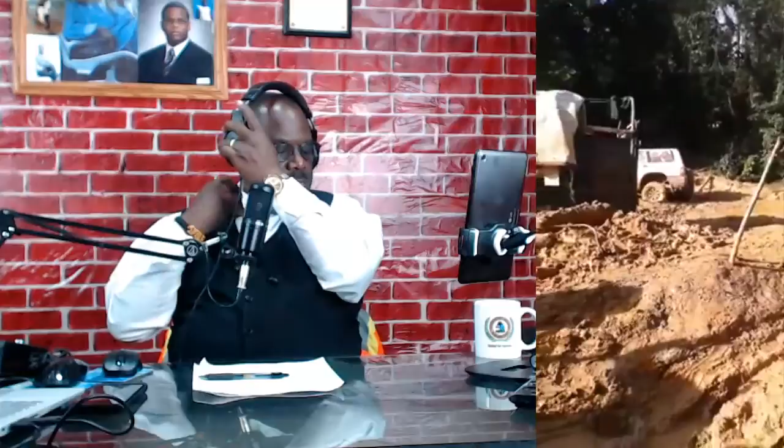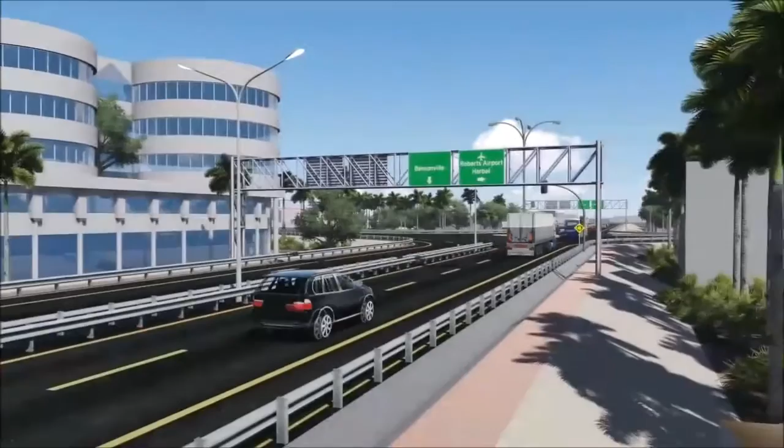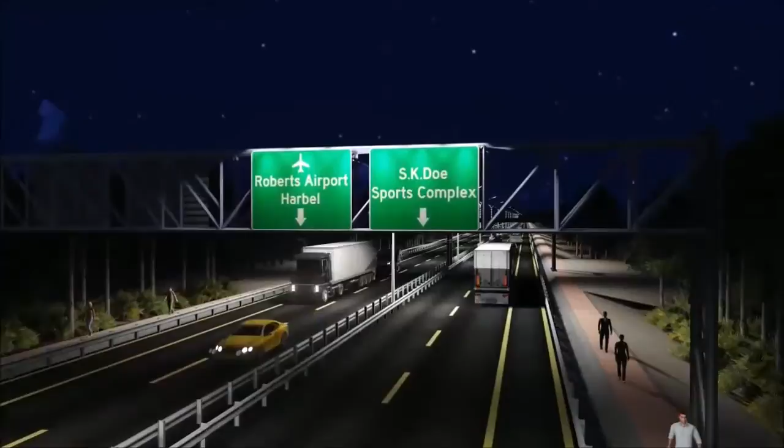D12 on the beat. All I do is win. Born to win, I say I was born to win. I say I jump over it, the hole you dig by me, I jump over it. They will see it. Jehovah bless you, no man can curse you. All I do is win.

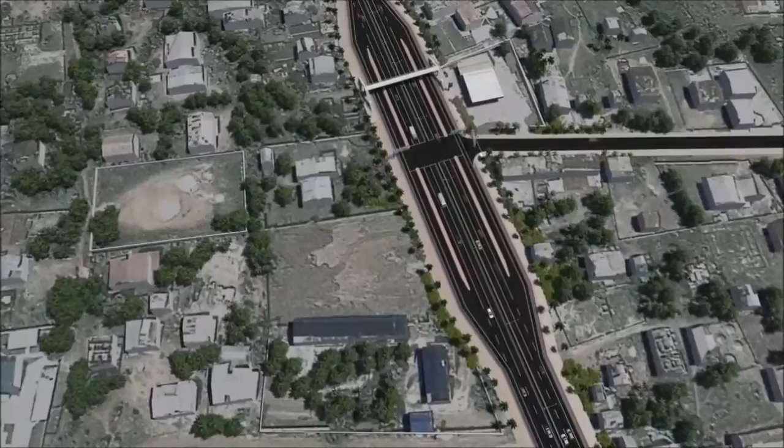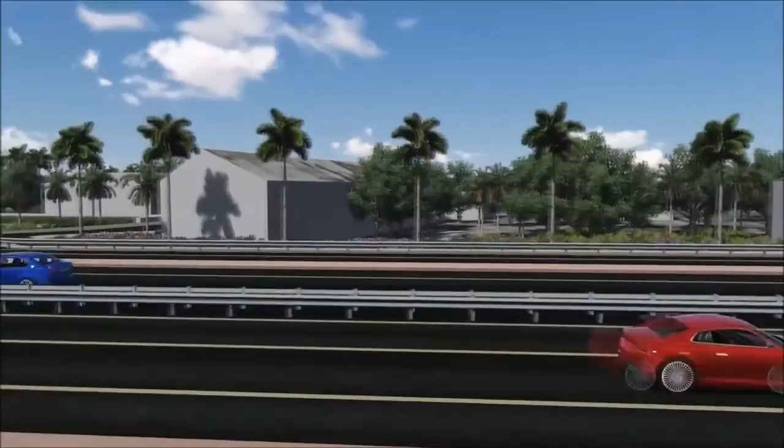Born to win. I say I was born to win. Born to win. I say you was born to win, yeah. All I do was win. I say I jump over it. The hole you dig for me, I jump over it. I say your time, now your time, nobody can stop it. They can do what they do, and they can talk what they talk.

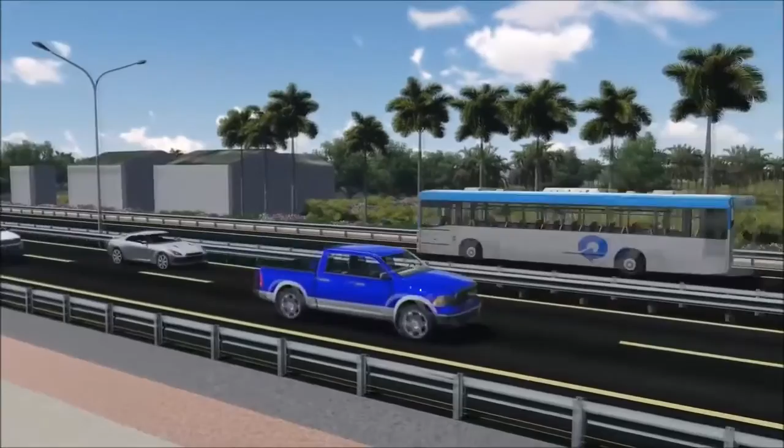Hey, turn the fire, Holy Ghost fire. All I do was win. Born to win. I say you were born to win, yeah. They will see a koro with a big eyeball. They will see a koro with a small eyeball. Jehovah bless you, no man can curse you. I say your time, now your time, nobody can stop it.

I say I jump over it. The hole you dig for me, I jump over it. All I did was win, win, win. Born to win. I say I was born to win. Born to win. I say you were born to win.

So that's just a schematic, just a drawing, rendering of what they think is gonna happen. But like I said, if that was something that they're truly gonna build, there's no way. Even if they're gonna do it like that, even though it's not gonna be by standard, there's no way. They don't have that kind of money anyway. But let's go on. I will show you now

another video. This video is about typical cross-section, and since I'm going to be talking about public works typical cross-section here tonight, pay attention to this typical cross-section they're going to show you. Okay, in Liberia, the reason why I'm bringing these things up, these people are going to spend a lot of money on this road, and it must be done properly, even if it's not to modern day standard. They shouldn't give us something like what they did with

what I call the Monrovia Kakata Highway. Monrovia Kakata Highway was built back in the 40s and 50s. Okay? Way before my time. But anyway, Madame Sirleaf and her people came. They said they want to redo the road, which was a beautiful idea. At that time, we didn't have Facebook and what have you. So I was on air and I was saying, but of course, LIBERIA Public Radio will be on air for a long time. Anyway, the point is, they took the alignment.

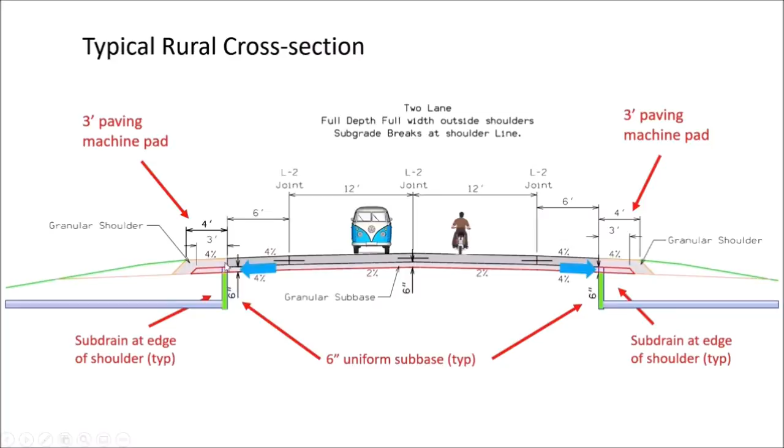This is a short video about roadway fundamentals. One of the things we do in our state in rural areas is we use a concrete cross-section. We usually have two 12-foot lanes, two 6-foot full-depth shoulders, and you can see they're usually connected with steel at the joint. We have this thing called a 3-foot paving machine pad, to allow the paving machine to drive along the side and have a good base to drive on. We have sub-drains to drain all the water that's underneath the cross-section, and it'll drain it out to the medians. Once it's paved and the machine goes off, we'll just cover this up with some granular material, and that's the cross-section in the rural areas.

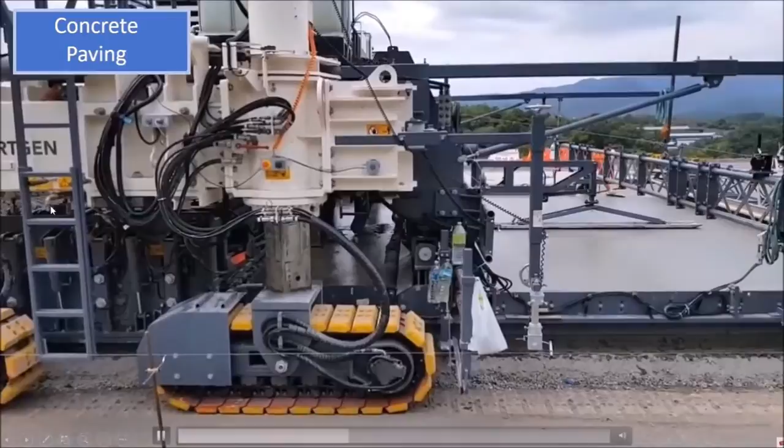So you might have to cut this area out and fill this area in over here to build the rest of your cross-section. Most cross-sections have two 12-foot lanes. It could be up to 4 lanes, 6 lanes, depends where you are in the city. 2% is typically used to get the water to go off to the curb and gutter on the sides.

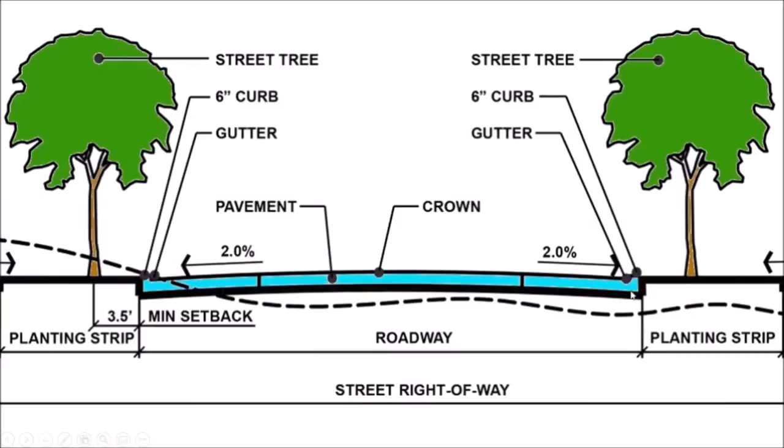We have a planting strip, put a little green area in, partially to make it look good and partially to protect the sidewalk where pedestrians are going. In the United States, we have a maximum grade of 2% cross slope. That's for the ADA, the Americans with Disabilities Act. So 2% is the max.

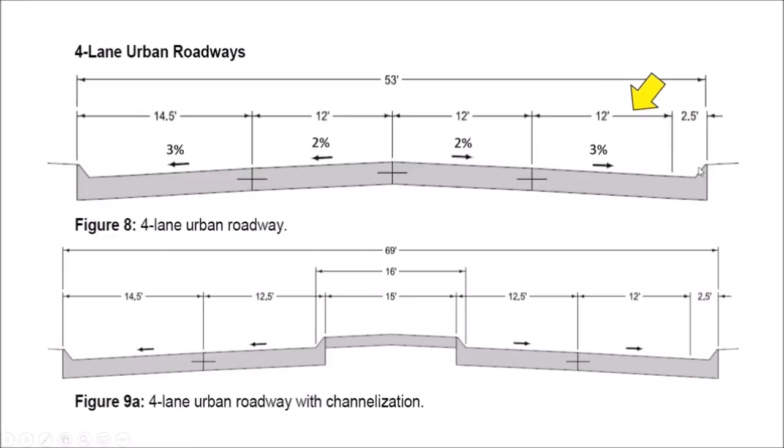I just wanted to show you with this slide that typically we start with 2%, then we might go to 2.5% in the next lane, and then 3%. It's to get the water to drain off a little faster and a little faster. The more pavement you have, the more you have to drain the water off. And this would be a 12-foot lane with a 2.5-foot gutter over here. Typical cross section, two 12-foot lanes on both sides, a median, some green planting area.

Things you've got to think about: curb and gutter. You've got to have curb and gutter. You're going to need some drains for the water, obviously. Sidewalk. You can see in some urban areas they don't have this green strip because they just don't have enough right-of-way. They don't own enough property to build this sort of thing.

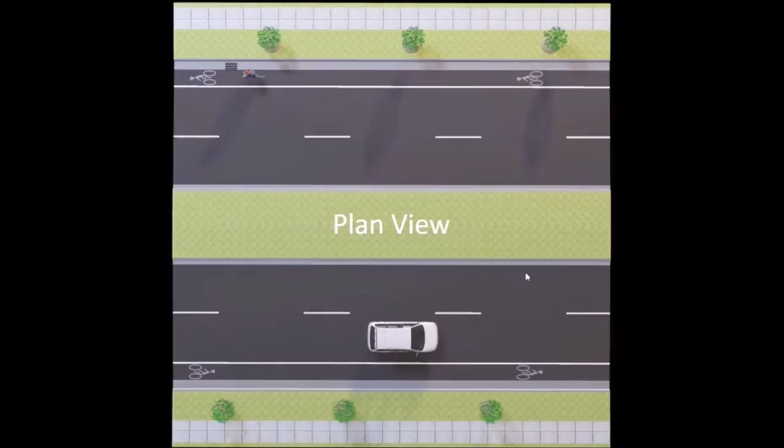This is called a plan view. So when you're looking at a plan set, you're looking straight down from the sky onto your project. So this is a plan view. Typically in engineering drawings, we lay things out in a plan view. So this is a horizontal alignment. It's the alignment of the road. We're starting with station 0, going to 100, 200, 300.

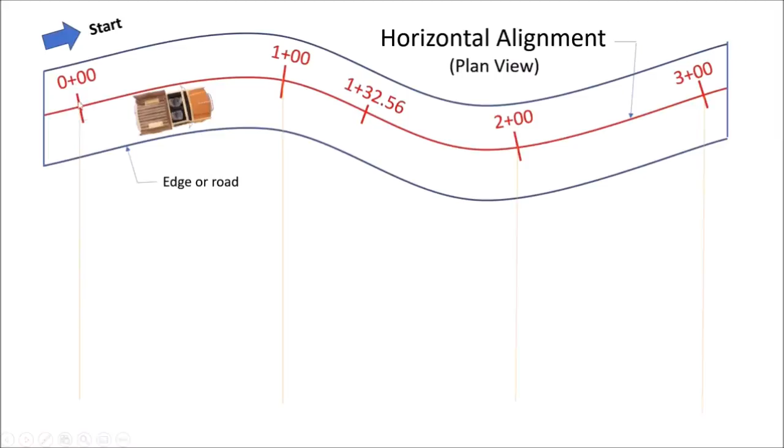Some point along this curve, 132.56 feet. So that would be 132.56 feet from here. We use the horizontal alignment to lay out the stations. And from these stations, we can see the elevations. And the elevations of the roads are called the profile view. So this is a vertical alignment. And you can see the station is going to correspond to different elevations so we can lay out the road.

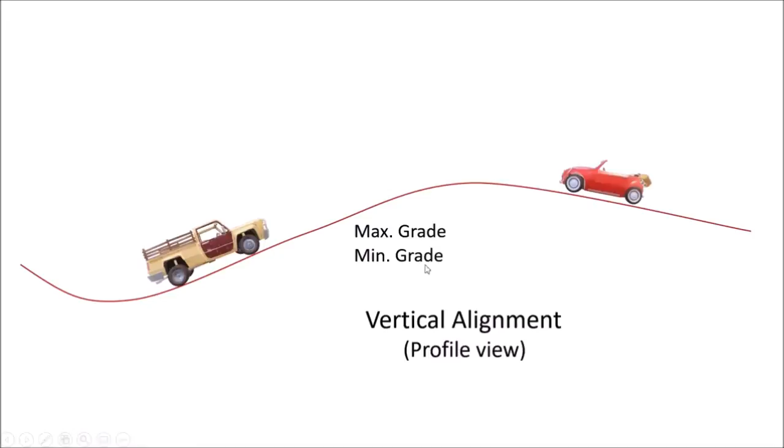When you have a vertical alignment, things you have to worry about are the maximum grade you're allowed and the minimum grade. You don't want a big grade, I don't know, 11%, because it's hard for trucks to get up carrying a full load. And you don't want a maximum grade going downhill of 15% because it's really hard on the brakes on big trucks.

Other things you've got to worry about is sight distance. When you're passing someone, you want to see oncoming cars, you've got to worry about how your profile is working so that you can see other cars. Three types: intersection sight distance, stopping sight distance, and passing sight distance.

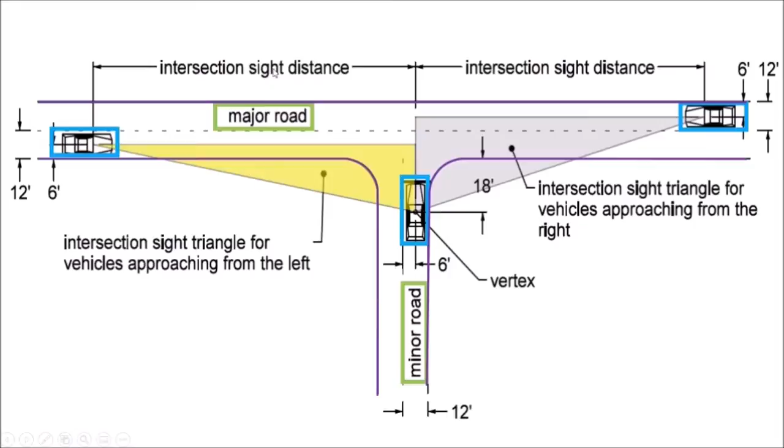So intersection sight distance: there's a car here on a major road, a car here on a major road, minor road. There's the cars, and you're pulling in from a little minor road and want to get on the freeway. Well, the other cars can see you. The car on the left can see you at a certain distance. It's usually a triangular sort of system. That's what they're going to say they can see when they're driving along. And they can see the car.

That's good. Car on the right, same sort of thing. You're going to be watching your lane and be able to see this car coming into traffic. So the last thing you want to do is put any trees in here so you block the view of these 2 cars on the major road. So you've got to worry about intersection sight distances and obstacles that go in these different corners.

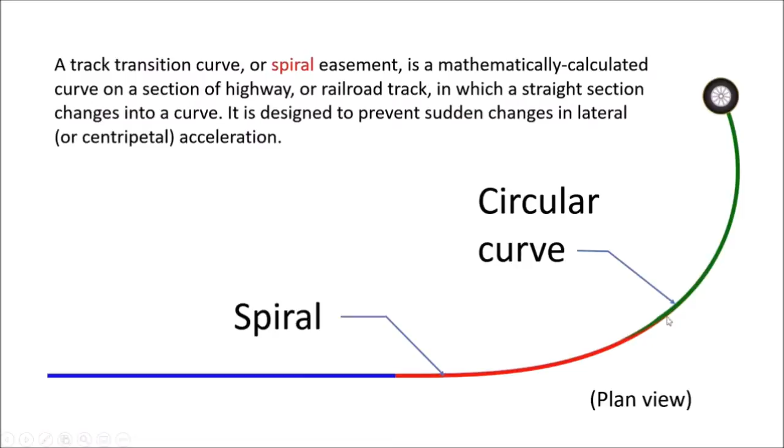When we design a road, we typically have straight sections, makes sense. We have curved sections, and sometimes we use spirals. Spirals are just a transition from a straight section to a curved section. In highway design, we don't use a lot of them, but if we have to, we'll use a spiral to reduce the force going around this corner. If it's a really high-speed corner, you might have a transition from a straight line to a curved line using a spiral. Typical roadway cross-section. If you're building new, your existing ground might look like this.

So one of the things you want to do, you've got to be aware you're going to cut this material out and you're going to need to fill this material in. So when they want to do a mass balance of cut and fill, they try to put the roadway somewhere that this cut can fill this fill. That way you don't have to haul long distances or bring in extra material. So that's one of the things you want to look for when you build your profile.

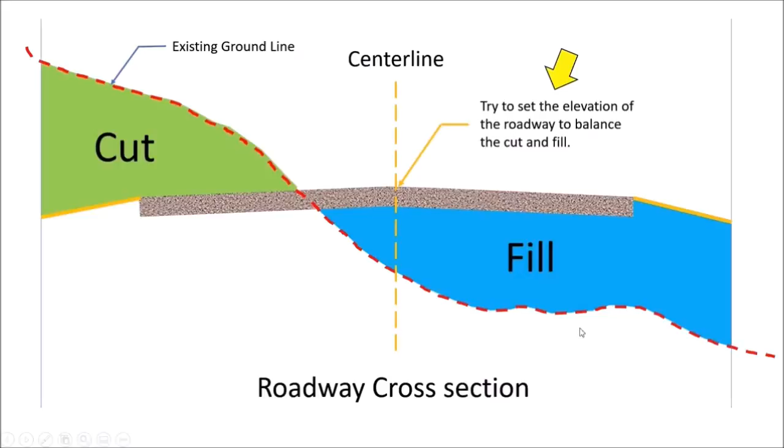Now, the young people from Ghana that come in and do the design. This last one you saw there, where the guy has a dotted line, like a dash. That's like an existing ground, and the part that's hanging up there is the structure section. Well, the young people coming from Ghana, they don't put any kind of shoulder backing or anything like that. They just leave the pavement hanging up there. So nothing here on the side. And that's what you find on the beach behind the BTC over there. This company that is giving the contractor, they're doing that.

So let me now go ahead and show you something here, okay. I might just have to take my own picture, but before I take my picture, I just want to see something here. This is going to be the first thing I want you to look at when I show this. You see what it says over there? Owner, Ministry of Public Works. They own this, so I'm not making it up, folks. So here is what I want you to see. I don't need to show my picture. Okay, but I want you to see here.

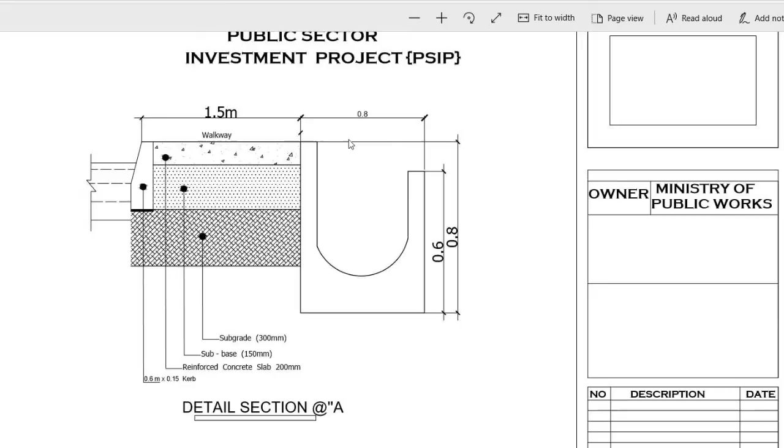Okay, this particular detail here. Typical cross section, public sector investment project. PSIP, I don't care for that one. That's them, okay. But this is what I want you to see. You saw the cross section that I showed you earlier. The guy came out and was showing you how to do the drainage and things like that.

Now, this other one here, you see this squiggly line here, you see my mouse moving? Where you see my mouse moving, that's like a cut. There's a continuum. That's a pavement section that continues on. This is from Public Works. So what they have here, this is like asphalt pavement, they say, where my mouse is running here. Then behind that, that's a curb.

And this is the flaw, because if you go on Somalia Drive, this is how they build it, because Public Works gives them these things. I don't agree with it, and here's the reason: if you don't have a monolithic type of curb here, in other words, you have a curb but it's separated, so you're paving asphalt against it. Let me zoom in some more so you can see what I'm talking about.

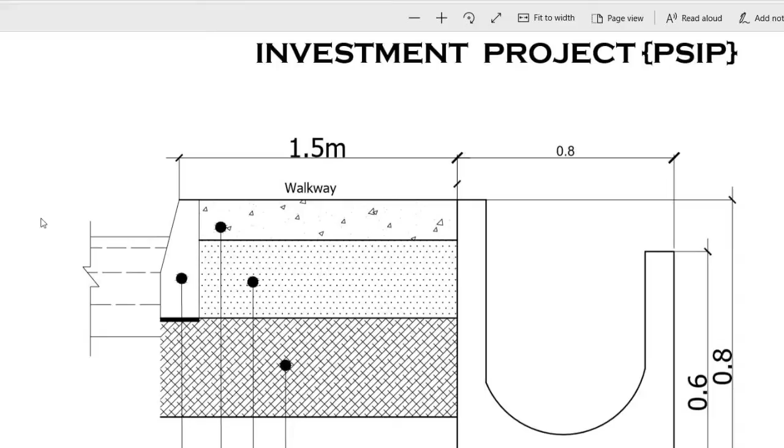Okay, so this particular curb here. This is supposed to be the pavement, where my cursor is going up and down. So they put the curb here and they pave against it. There's a huge chance that there's going to be a leak between the asphalt and the curb. The water is going to seep through here. However small, it can seep through there, and then it goes through your pavement, and then you have problems, especially in Liberia, where we have a rainy season like that. So that's what they do here.

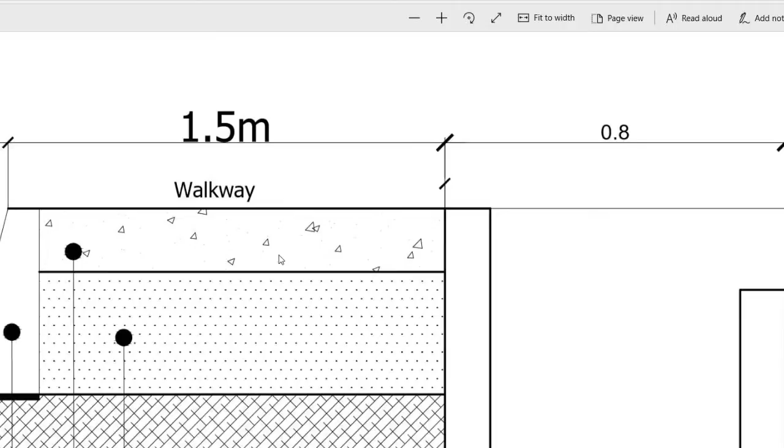Let me show you something else. So from there, on top of that, they have sidewalk. Then they have the dirt underneath. Then they have a real subgrade. But the main thing I want you to see is this is how they build their drainage system in Liberia. You see in the back here, they call it a U drain. A U drain is like a letter U. So this is open. So if it rains, water gets in here, which is good.

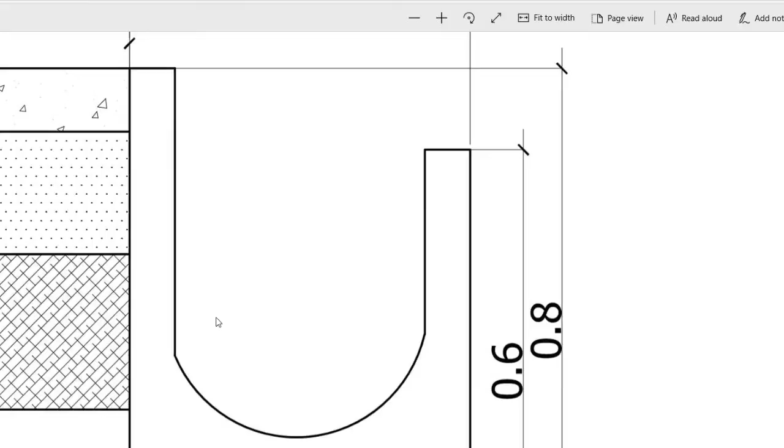But what happened to the water from the street? Do you see any kind of connection here between the U drain and this asphalt? I don't see it. So the water that comes into the U drain, you're collecting it from somebody else's property. It has nothing to do with the road, nothing whatsoever. But this is what they give us. Let's go to the street level. I'll just show you the detail.

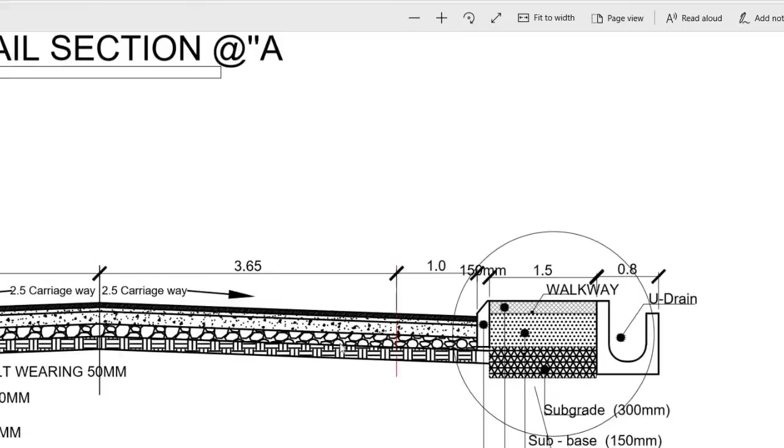Okay. Let's go to the street level, and then you'll see what I'm talking about. Okay. This is from Public Works, folks. I'm not making it up. I just told you, I'm not making it. Okay. Here's the road here. Here's the U drain they have by here. So from the U drain, they have this, and then they have the curb.

Now the pavement, I told you the slope they have. Let me make it bigger so you can see the slope. And it's 3.6, which is 12 feet. Okay, so that's meter here. So the 2.5 carriageway, that's the slope from the crown here. Okay, now if you're draining this water, where is it? How is it going to get back to the U drain back here, my people? You tell me now. Tell me now.

So what I'm assuming is that this water is going to go far away somewhere before it gets into this drainage. Because right now, if it's raining and the slope is sloping downward and you use this, I can see. But why will you not even put something here to go to the U drain?

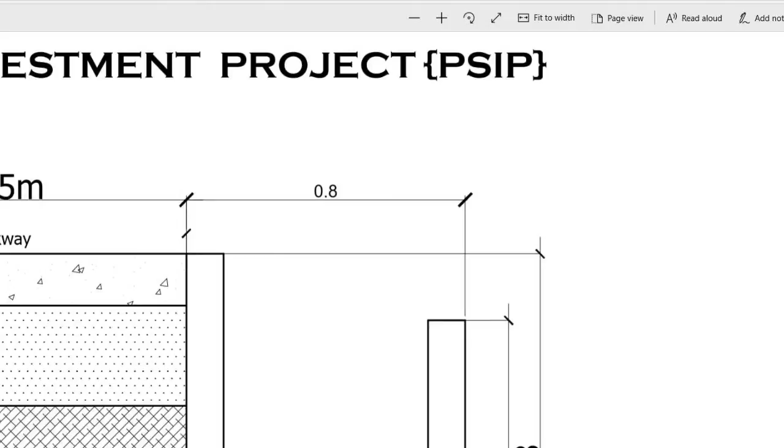Okay, let me show you again, folks. This is from Public Works. Let me zoom out so you can see it. Right here, you see it? Okay, Public Works. That's what they're giving us. So when I did the work for them, this is what they showed me. This is Public Works, folks. Owner, Administrator of Public Works. All right, and I'm not degrading them. I'm just faulting. There's a lot of fault on this here that I want to show you.

Let me go to another one, another section. And then I will come out and show you my own. But let's go to the next section. All right, so this is another section. This one, I'm not too sure what it is. Okay, but they're closing now. This is closed. This is closed. And you've seen many of those. They're closed. Box drain, they call it.

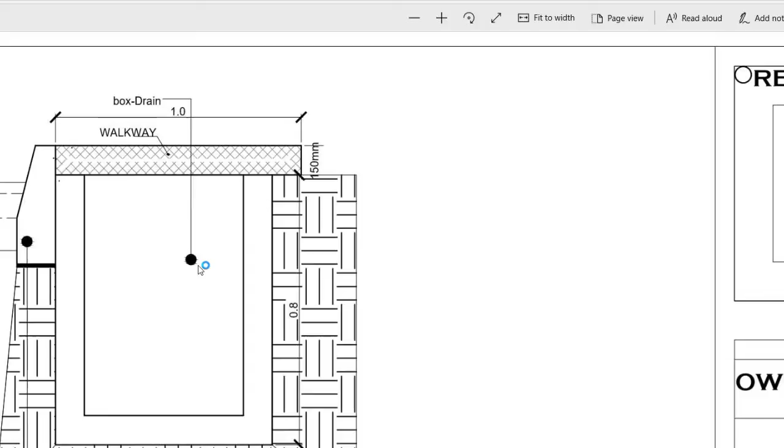How do we drain into this box drain? How do we drain from the street into the box drain underneath the sidewalk? How do we drain that? I don't see it. But these are the kind of details they sent out for designers to follow. And if you're a designer who does not have the experience, you think that they don't care to drain. But I know that eventually they're going to have to drain into this box drain. And so what do I do when they send me this thing? I say, what kind of thing is this?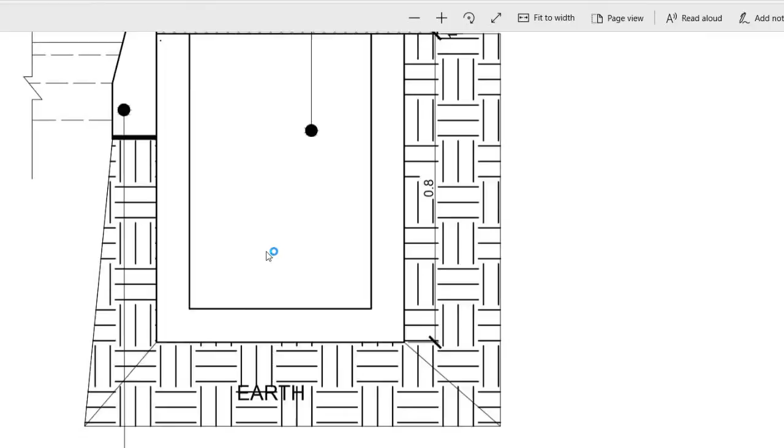This thing, my people, they're killing us, I'm telling you, they're killing us. That thing here, it's sloped to one side, as you can see. Why will you need a box drain on the side up on the hill? What kind of water now goes uphill? Why will you put a ditch on the uphill? For what reason? All of your water from this road is going into the downhill side of the ditch, and even if you put a box drain there, what is the purpose of putting a box drain on top of the hill? What is it going to drain?

And people are not paying attention, and these are the kinds of drawings they give a designer to design. Most likely, if people don't do it well, these are the kind of things you're gonna get. Where in the world, even your own house, does water go? Downhill. No water can go uphill.

But here is Public Works telling us they're putting a box drain on this side, on top of the hill. And then they say, okay, we put it there, but we don't know what water is gonna get in, but we know water is gonna go downhill at 2.5%. So the box drain here, that's fine. But this is a waste. This is a complete waste.

Unless you have people living way on top of the hill here, the water coming from the slope and coming in here. I can see that. But if they're so, then tell us what it is. But nothing here. Okay? So this one is like a super elevation. You know, when you're making a curve coming off a highway or getting on the highway and you bend the curve, where all the road going super elevation, okay, this is what it is. Pretty much that's super elevation.

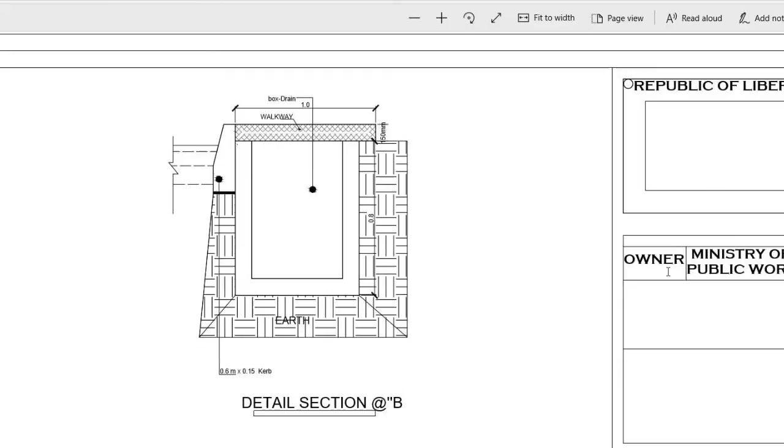Now who owns this? Again, let's look at them. Folks, I'm not making this up, okay? I don't want to show the people that did this thing, checked by Bureau of Construction. I don't want to show the guy's name, because I don't want people to say, hey, how can you show my name? I don't want to show anybody's name. But I know Public Works owns that, government entity. Those people, they work for Public Works. But I will not show their name, because I know it's not the way they want it. So this is Public Works property.

Let me show you another one. And then I will show you my own, folks. Samson Toh, Liberia Public. Okay, let's show another one here. Okay, I think this is the interesting one. This is the one. Every time I look at it, I laugh. But before I carry on my laughing, let me show you first. Okay, Public Works owns this. But let's look at it.

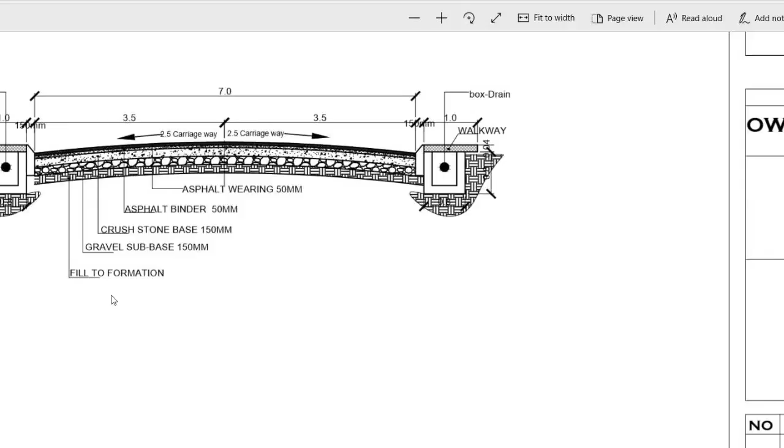While I'm laughing: where in the world that the dirt Jesus Christ made that you're gonna have a curved dirt like that? Where in the world do you have a road that has a curved dirt or round dirt? You can only do slope rounding at the very top, but not on your roadway. Look at this. Let me make it bigger. And these are kinds of stuff that these people will give out to the contractor as being part of their design criteria. Where can you find a road that has a curve like this underneath, and then the pavement all smooth and curved? Are you kidding me? In Liberia?

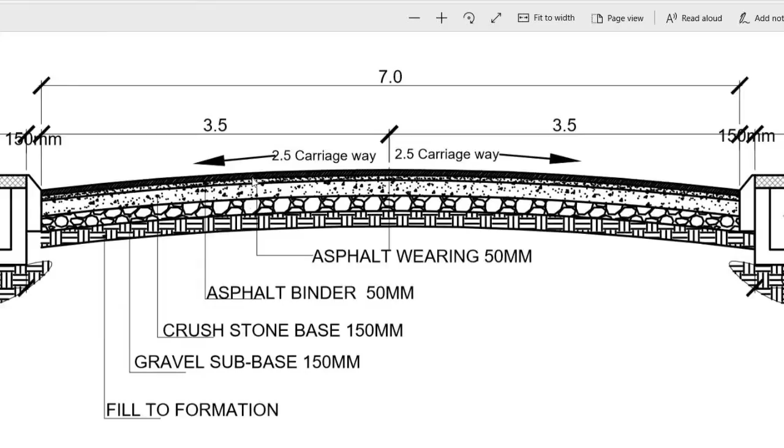Why are these people giving these? These are kinds of stuff that I'm concerned with. Because if you're going to do this, why will you give a curve like this? I've not seen it before. Maybe they do. This is like a bridge, but a dirt road is not a bridge. You grade. If you're gonna put a crown in it, you put a crown in it, but you grade. You don't put a smooth round edge on the dirt on the road. What kind of car will be driving on it? The car will fall down. Folks, I'm laughing now, but these are people that will be involved.

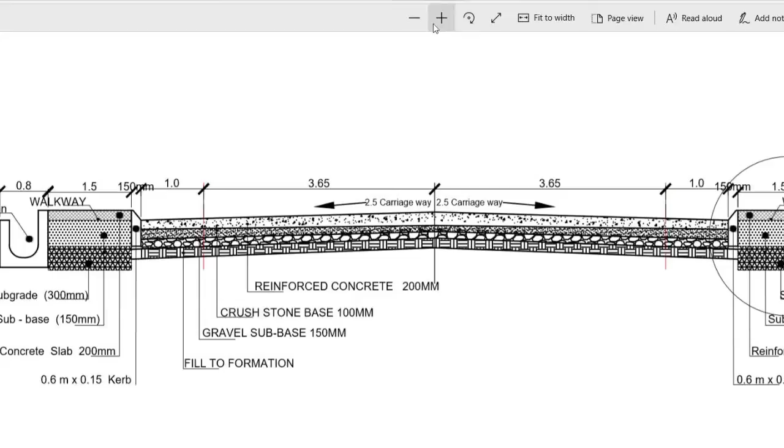Here's what's happening. Okay, I can see this. You see here? This is what I'm hoping to see. You got a concrete road, 2.5 slope, okay? And you're saying to the contractor, build it like this. I still don't see how you're going to drain this road, because I don't see any kind of drainage system. I don't. And I showed you here earlier what they needed to do.

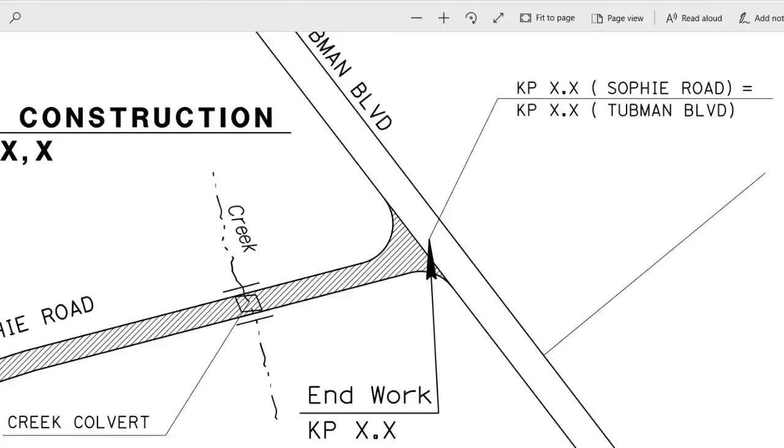Okay, now here is my handiwork. Samson Toe handiwork. I don't put my name on it. But anyway, let's look at it. First thing is this. So let's look at it. It took me a long time. I spent a lot of time on this thing. Free. Nobody paid me anything. So don't let anybody fool you.

But I had to digitize the whole country of Liberia, including the counties and stuff. The reason I did that is so that if you look at this drawing, I must be able to tell you where in Liberia this project is. So right now, you look at this drawing, you look at the key map, the location map. You say, oh yeah, the project is in Montserrado County, because Montserrado County is hatched out. The rest of the counties are just there for you to be able to find the location.

So you can stay here in America, I give you the drawing, and you will be able to identify what this project is. Okay, so let's go ahead. So that's the key map, the location map for this project. All right, now let's go on and look at the project itself.

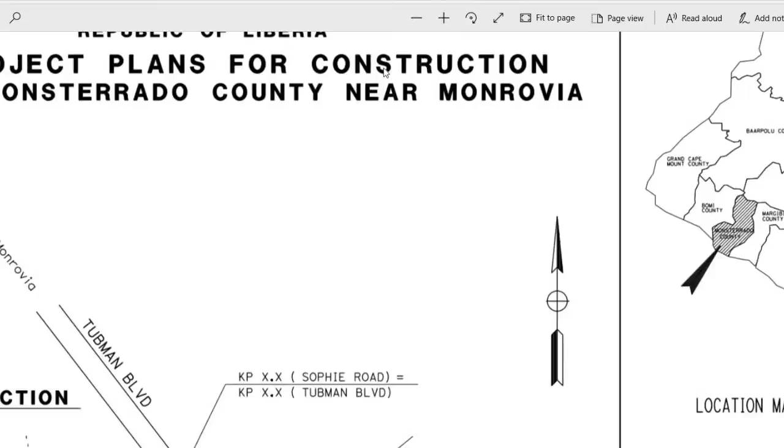Look what I have down here, and this is how you identify these projects. Look, folks, I'm not trying to toot my horn this afternoon. I just want you to see how these things are done, and you tell me if anybody picks this plan up, that they will not have a clue what is going on. I say here, Republic of Liberia. Project plan for construction in Montserrado County near Monrovia. Because I call it Sophie, not in Monrovia, so I say near Monrovia.

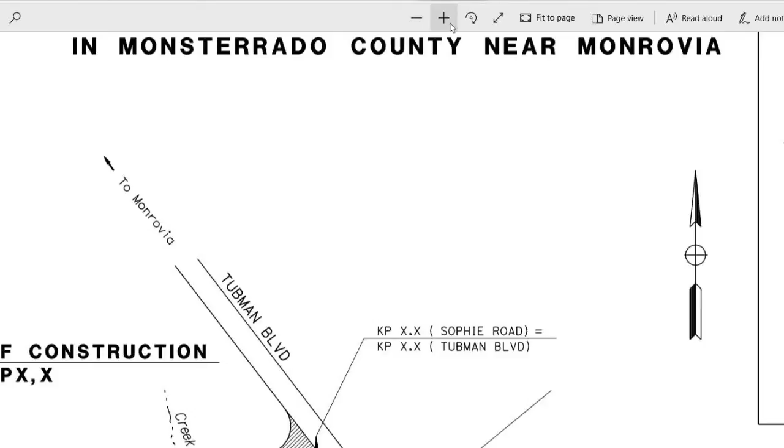Okay, now let's look at the roadway itself as I have it. So the first thing I did is, this project is the hatched area, the place that I hatched. But look at what I have. Tubman Boulevard, okay, but where are we going? To Monrovia, you see here, you see the to Monrovia? To Monrovia, you see it?

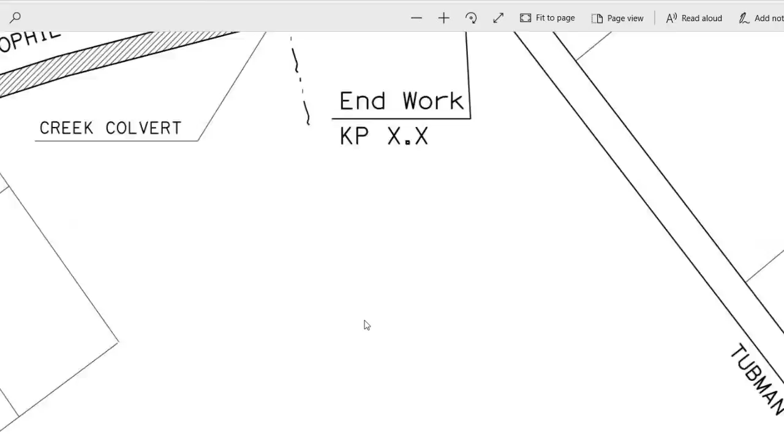So anybody comes, I'm here now at this place, Tubman Boulevard, but this side will go into Monrovia. The other side, Tubman Boulevard, past the project itself, I'll tell you where you're going. That's how you give the location. You see the other one I said to Paynesville? Now you're going to Paynesville. One side you go to Monrovia, the other side you go to Paynesville. Okay. Now let's look at the project itself.

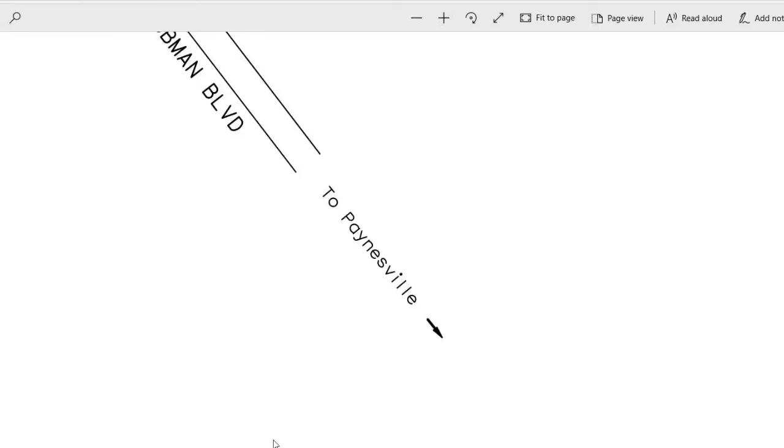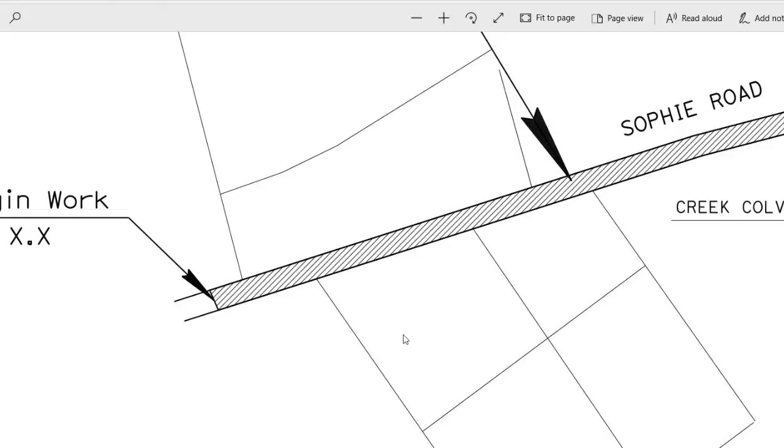So let's look at the next side now. Here is what I'm doing. I say, okay, I give you this project now, but this is how I want you to build it. I want you to build this. The center here I have number 2. I'm giving you station from this station to that station. This is what I want you to build. Let's look at this, the left side.

Because of the size, I'm giving them 11 feet. Remember, I told you guys the other day, they will allow you to build 11 feet. You can't go anything less than 11, but it's supposed to be 12 feet. So from center to the ETW, which is the yellow line. The yellow line is ETW on the left side; on the right hand side is white line, and the reason they do that is because they want your light to shine on that white spot at all times. But it's called ETW.

So this is what I want you to pay attention to. This is how you build the curb. It's a curb, all concrete. So even if I don't put a structure and put water across it, I have a slope. The water's gonna go along. It's called curb and gutter. You don't separate those things anymore. Behind that, I have a sidewalk.

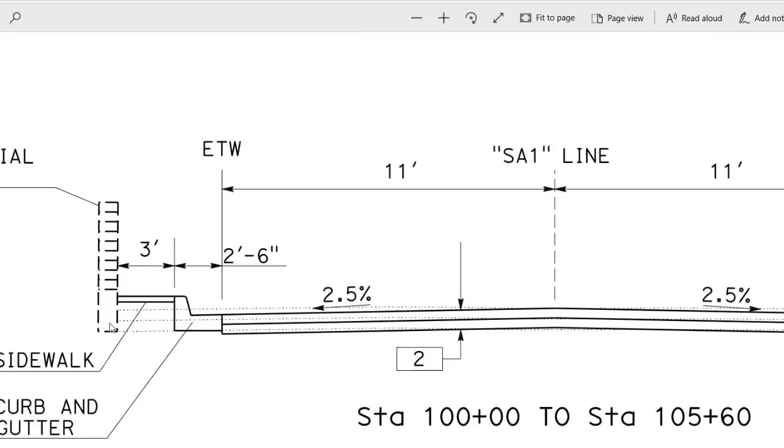And here's the funny thing here. I think I have the building here. I have the road itself. I have it on video. The sound wall, I call it sound wall. Back there they don't do sound walls, but most of the roads in the areas have concrete walls on the people's property. And I can't do anything with it. I can't break the people's wall down. I wasn't given permission.

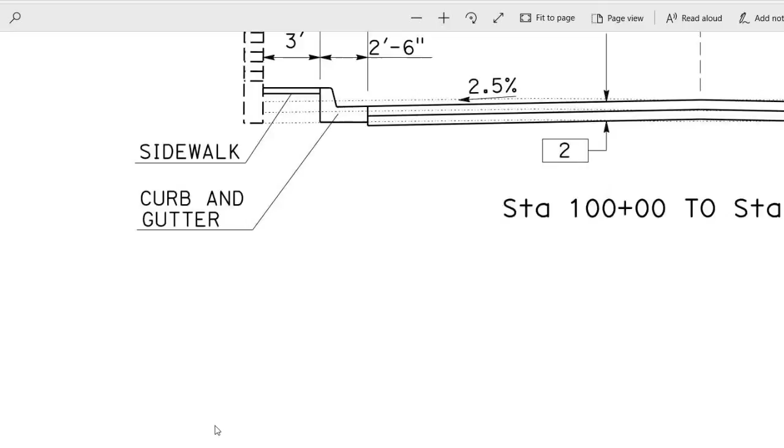So let's go on to the other side. But let's look at the structure section. You see the number 2 that I have here? Now let's go. How do I define this number 2? What am I saying about this number 2? Let's look at this. First thing is, let's look at the design designation.

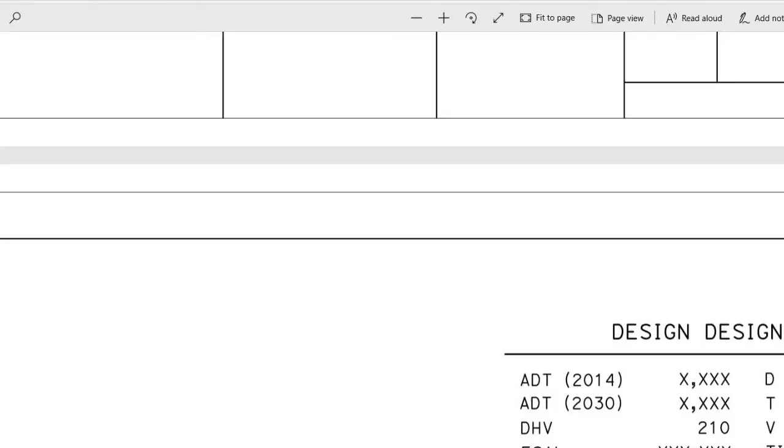This design designation gives you the average daily traffic in that area for 2014, and I'm saying up to 2030. I don't know that because I never did any kind of traffic study. That's their job. They're supposed to do that and fill it in. So on this little road, I did everything. I want the direction of traffic at one point on this little road to be 60%. The truck, whatever truck they're going to be using, I estimate the truck to be 9%. So they're going to have to come up with a speed on the highway, most likely maybe 25 miles an hour.

But here it is. I'm building this road based on the structure section I'm selecting. The TI, I'm giving it 10 years. If they follow exactly what I put down, 10 years. Because I've done my research. And that's why they call this design designation.

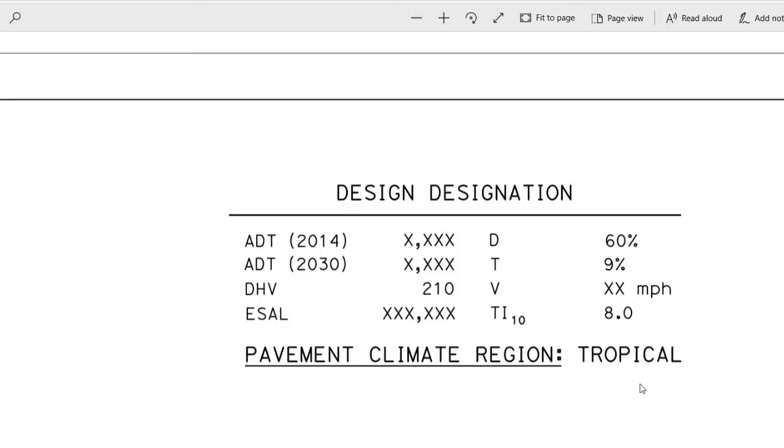But look at this here. Pavement climate region. What do I have here? Tropical. I didn't call it winter or summer or something. I said tropical. And that's what the Liberian region is. That's what the whole West African region is. So if you do your design like this, somebody who is not even an engineer will be able to understand that.

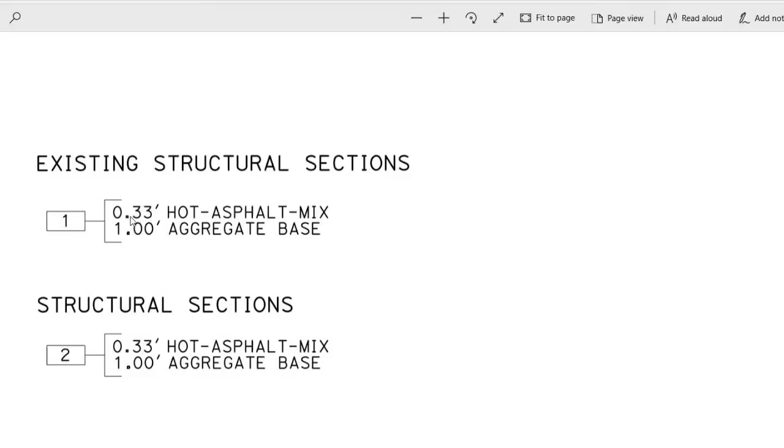Now here is another note. I said for accurate right-of-way data, contact the right-of-way engineer, because they didn't give me any right-of-way, so I don't know that. But here's the thing. Existing structure section. Number 1, I say it's going to be this, because that's what they told me. Somebody did a core, and this is what they told me. Hot mix asphalt is 0.33 feet, and then the aggregate, they got 1 foot. I'm putting the same thing back. Take it out and put it back. Now let's look at it again.

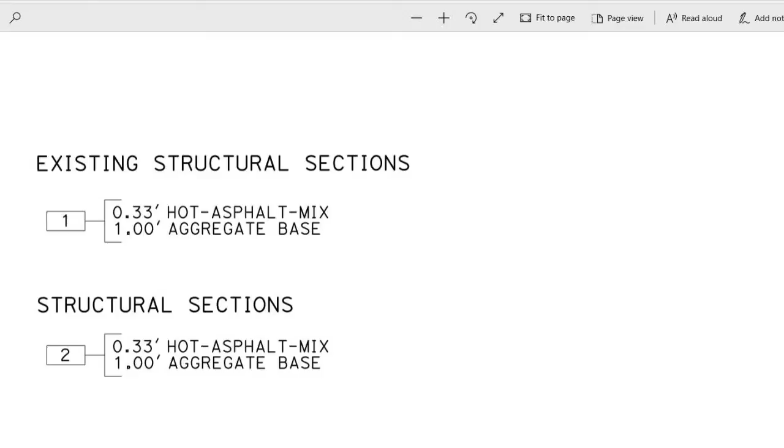Let's look at what I have, folks. If you have somewhere to go on this Wednesday afternoon, please, you don't have to stay with us. That's fine. But I want you to look at it.

So I'm saying here my number 2 is my proposed structure section. It's the proposed structure section. Number 1 is the existing. You see my existing?

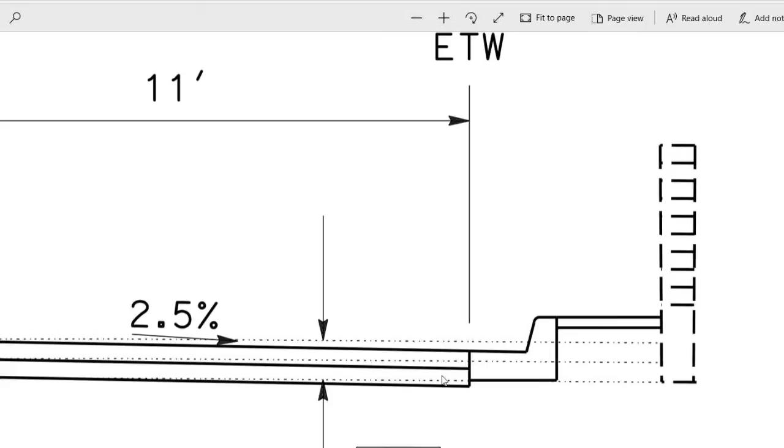Now let's look at this. Let's look at the existing, and then you will understand what I'm talking about. You see the existing? It didn't come to the solid line. It's all the way to the dotted line because that's the existing pavement. Existing pavement, but because of the 2.5 slope, it's going to go a little bit deeper, so they're going to have excavation. Okay, so that's how you do this. That's how you do that.

Instead of me coming here and giving some kind of thing here that most likely will not work. Okay, so let's go to the next slide.

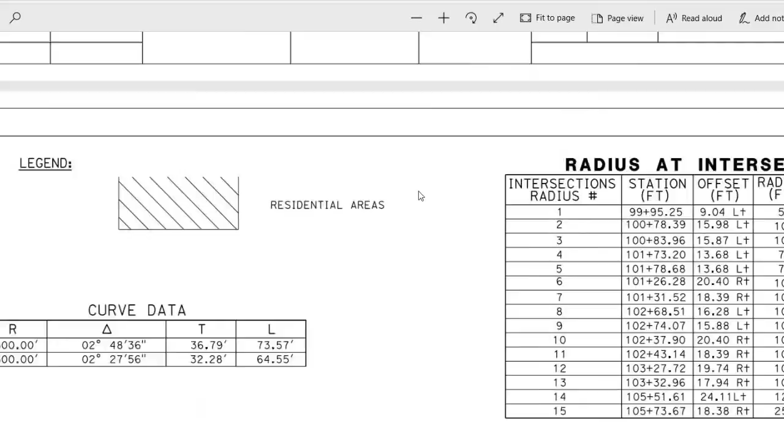Okay, the radius at intersection and blah blah blah, all that kind of stuff. But the curve that I have here on this road, the horizontal curve data. I got curve 1, on the other side there's curve 2, but then I have to provide that info. You see how flat I make this curve? 1,500 radius. Look at the tangent. Look at the length. Anyway, I don't want you to pay too much attention to that.

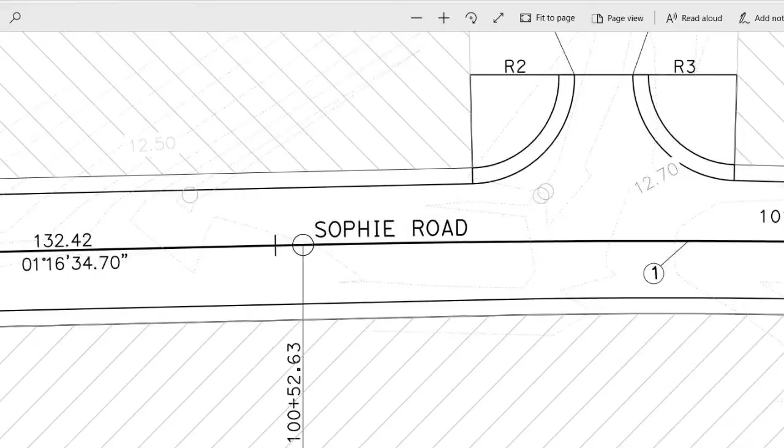What I want you to pay attention to is what I told you guys here the other day about alignment. This middle one here is the alignment. This is how I want you to read this alignment. You see here, I said from my alignment, which is SA1, I'm going 9.04 feet left, at this station, 99 plus 95.25 beginning. That's where I start my curb and gutter and sidewalk. This is where it starts.

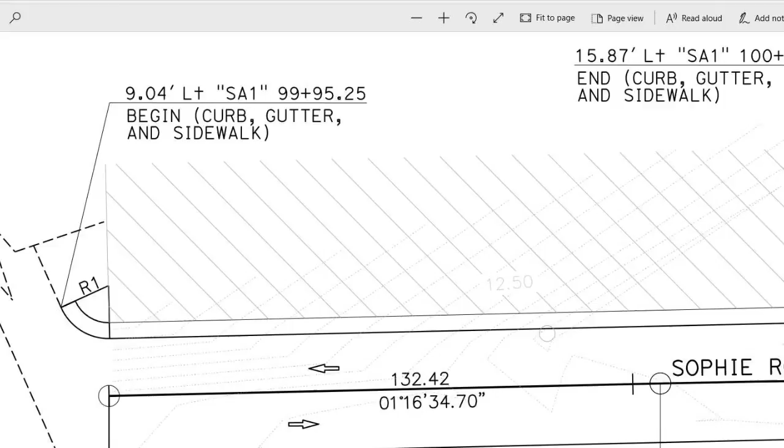And it has to have an end. Look at this. If you start something, you must end something. You see here, this is where I'm ending it. The end is 15.87 feet left. Everything is going left right now on this side because I'm going that way. Station 100 plus 78.39, sidewalk and curb. But look at the radius I put on there. I'm telling the guy that's going to build the sidewalk, this is the radius you have to use.

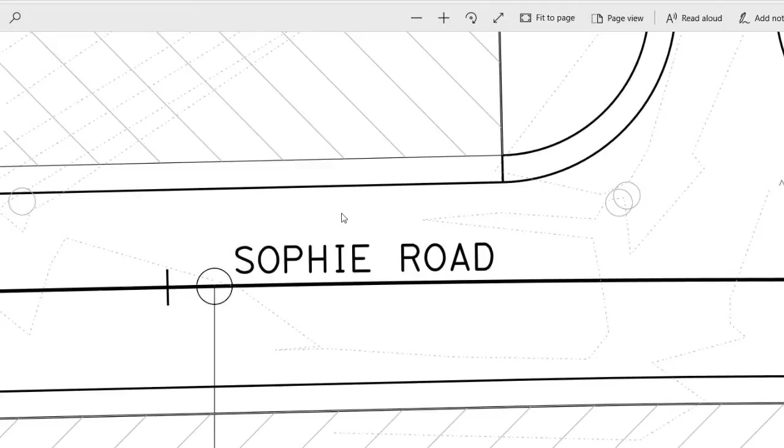And you see the name of the road, Sophie Road. Folks, am I making it up? Sophie Road. All right. So I don't want to bore you, but this is what you call layout. On your layout sheet, you identify every little stuff, everything. And this doesn't have much. So let's go to the next one.

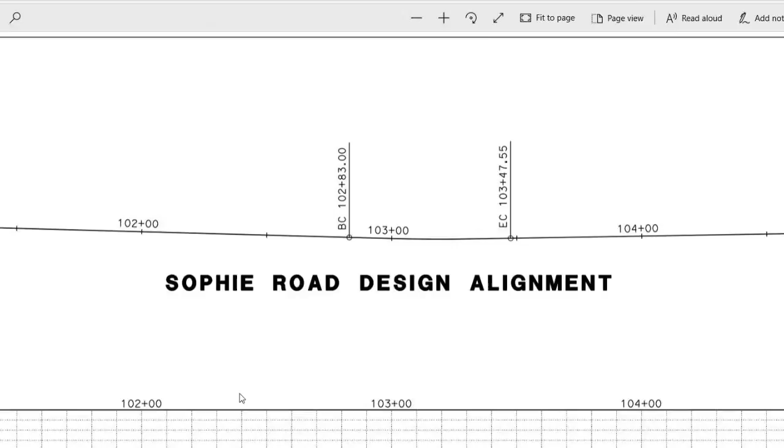I think this is layout 2, similar stuff. Layout 3, similar. Now we're back into Tubman Boulevard. That's layout 3. Now here's what I want you to pay attention to. This road. Here's my Sophie Road design alignment. This is horizontal alignment. Remember, like the snake going here and there. So we start from there, we go up.

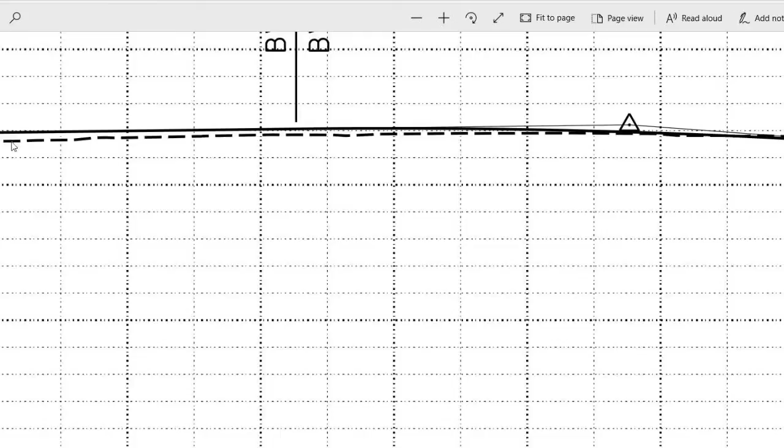But what I want you to look at now is the profile of the road. You see here, it's very challenging. I'm starting from the beginning. The profile, I want it to match existing. But as I move up here, with 0.59% up here, you see the dotted line? That means I'm leaving the existing road. I got to fill this place up, because the existing road is beneath the design profile. So I have to fill it in.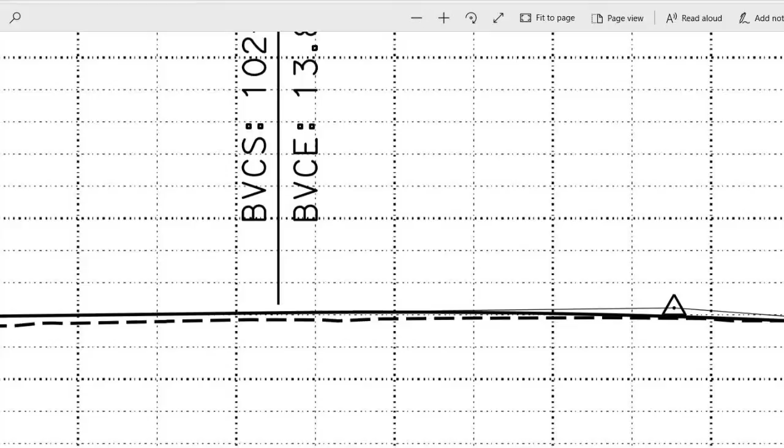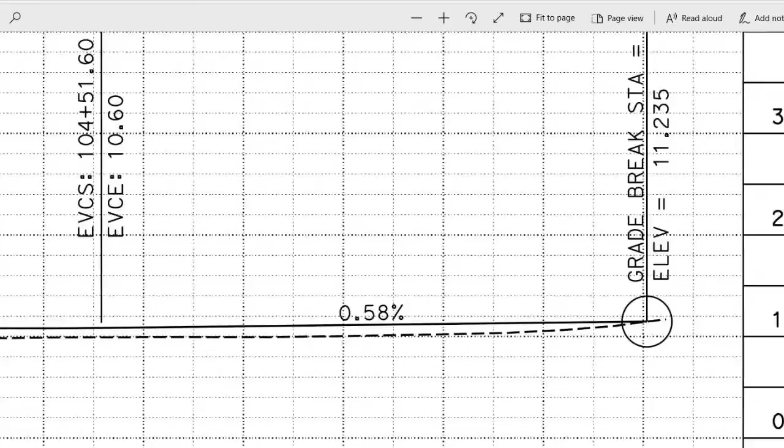Now let's go to where I'm cutting. Again, over here, we also have to fill it in. If your existing road is underneath your design profile, you got to fill. And most of the road is going to be filled anyway, because if you look at existing Sophie Road, they have a hill. If I cut the hill, I will be giving the property owners some problems. So I thought, leave the road as it is, just fill in and bring it up to standard.

All right, so let's go on to the next one. This is the profile, design profile of Sophie Road. If they follow what I have, they will be...

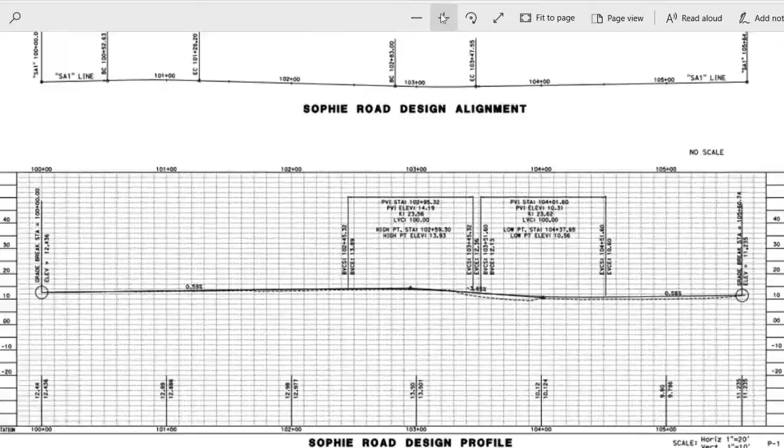If they follow what I have, they will be fine. But who knows? They might just not even say we're not going to fool around with something to stuff. Okay, that's fine. But these are the intersection design. Okay, and I'm not going to go into any detail about that one. So let's go here. Okay, I'm telling this is what I want.

Okay, here's another thing here that the people will benefit of. When you're doing construction, you have to be able to warn, because when you're doing construction, especially a rehab project, they have road, the people driving on that road already. So you have to put signs to tell the people what is happening, and you don't do it overnight. So this sign, for example, I got A, B. A, I'm saying road work ahead.

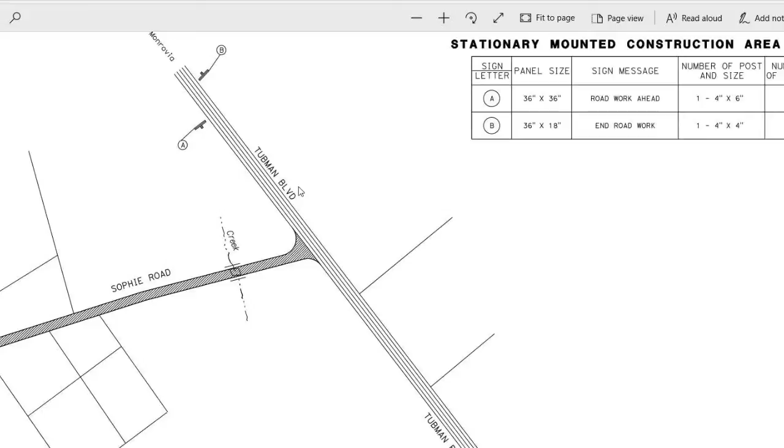You've seen those signs before. Okay? Then B, I say end road work. Now B, when you end road work, that means you're going. When you begin road work, that means you're coming into it. Okay? So that's that. All right. Let's go on. Here's the interesting one here.

I'm going to be constructing this road, but since I'm not going to close the road completely, I must divide it into two. One side is a construction, and the other side I will allow the people to drive through. And since it's one lane that I'm giving there, I'm going to have a flagger. Somebody down the road will stop all the cars, okay, from coming. And then you got time. You got to time yourself.

Maybe some other people do 2 minutes, 3 minutes. After 3 minutes, the other side going left, they go. After 3 minutes, all the cars going left, they stop. The other cars going right, they go. You have a flagger, and they're communicating with each other.

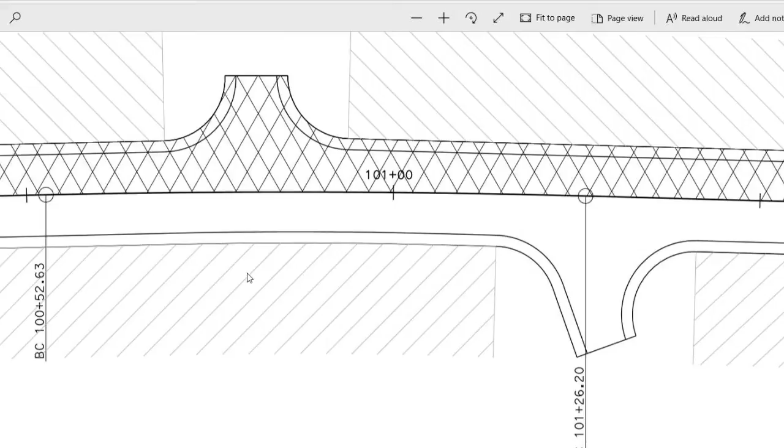Okay, but look, this is the interesting way that I'm doing this here. Now I have to show the contractor how this thing's supposed to be done. I'm saying here, this is the work area. Okay, let me zoom in some more. I say here, this is the work area. And as you're doing the work area, this other side, I put here temporary two-way traffic, because that's what it's going to be. Two-way traffic being controlled by flagger. Okay, all right. So this is called staging.

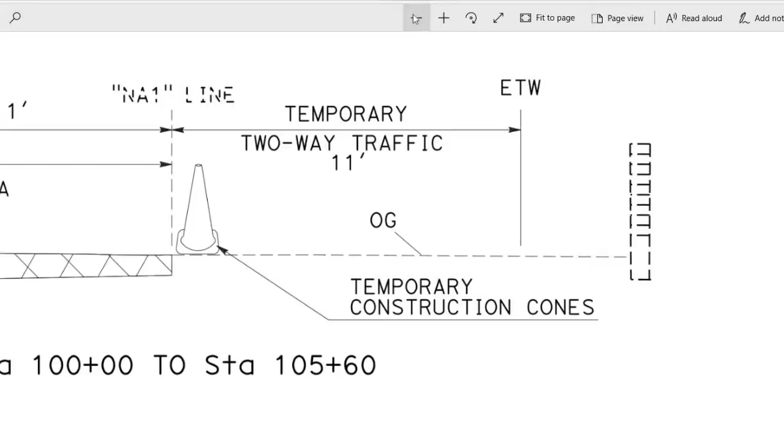And this is one of the critical parts that I'm going to be looking at when people start construction. How do they stage this road? How do they maintain traffic on this road? It's going to be critical. People come from here, they're going to Monrovia to work. Everybody that lives in that area, most of them going to Monrovia to work. How are you going to control the traffic?

Because if you say you're going to be working on the left side, people coming from Ralph Road is going to be the first place we're going to work on. You're going to put all of your traffic into the people going to Ralph. So you're going to have 2 lanes on that 1 lane. It's going to be interesting, folks. People say, oh, that we are not doing it. Yeah, you better think twice.

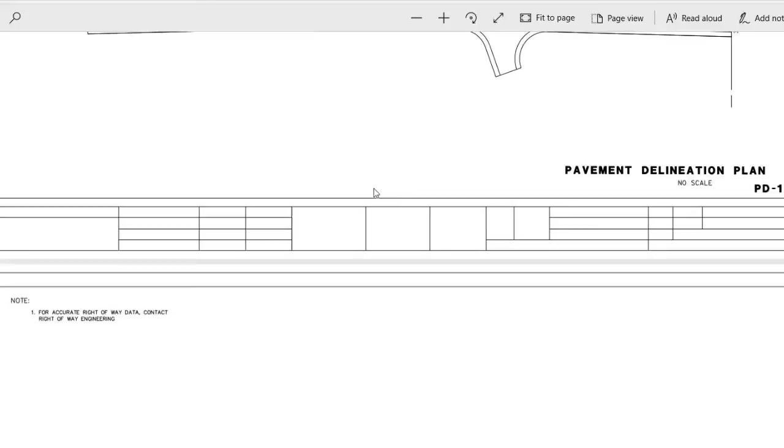Okay, so after this is done, I'm almost done with the staging here. After this is done, then I come out and paint the road. Now, the edge, your white edge, is called detail 27B. All of the white line you can see, not the striping white line though, but the straight white line on the edge where your light shines at night for you to know you're still on the road. It's called detail 27B. Now detail 22 is the one in the middle, yellow line. Okay, that would be your detail 22.

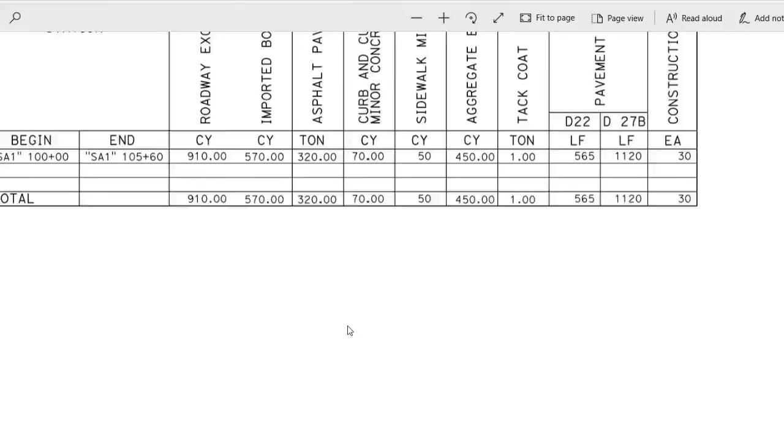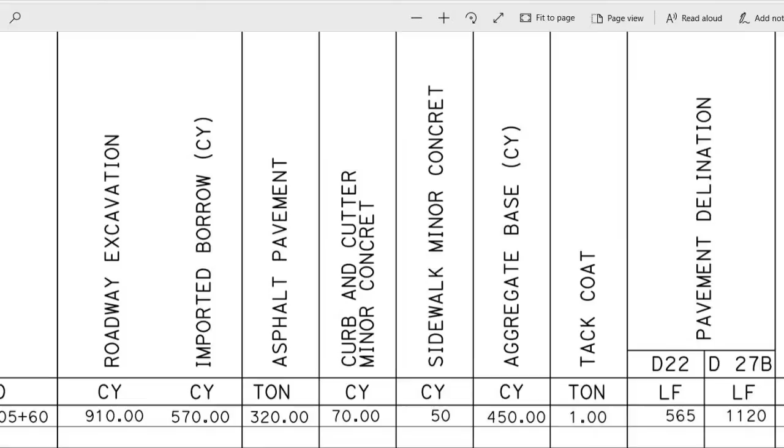Okay, so now if you do that, here's another thing here that I did. Roadwork items. On this row I have roadwork items. Now listen to these items. These are the quantities that I came up with. L1, L2, station this to that station. Okay, but look, roadway excavation. I calculated the excavation quantity to be 910 cubic yards that I expect them to take out.

Okay, import borrow, because they're going to have to do the excavation. When they do the excavation, yeah, Samson told you, you're just too good, my man. They do the excavation, they fill it in. But the amount of dirt, you heard a guy here, right? You need balance. So the amount of dirt that they're going to excavate to fill in is not enough. So what do you do? You do import borrow. You go and borrow from somewhere else.

And I'm telling them it's going to be 570 cubic yards of dirt they're going to borrow from somewhere else. Okay. So then I go on to the asphalt itself, asphalt pavement. Okay, in tons. Okay, 320 tons. Okay, curb and gutter, minor concrete. How much concrete is it going to take? It's going to take them 70 cubic yards to do the entire curb and gutter on both sides.

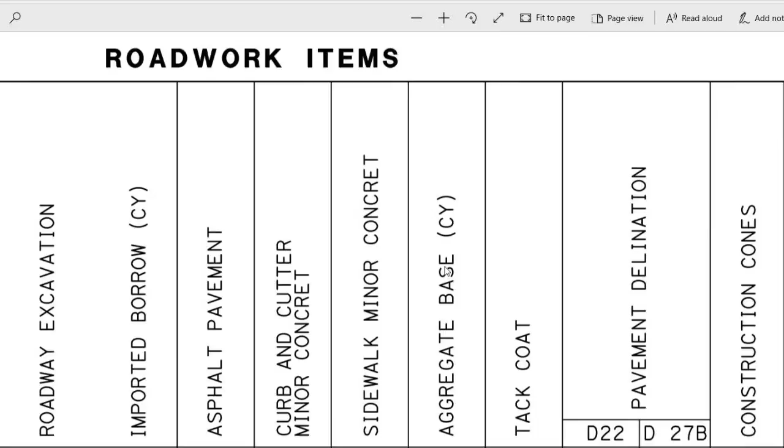Okay, sidewalk, which is also minor concrete. Okay, it's going to take 50 cubic yards to do. I've already done the calculation, so I know where they are. Okay, the aggregate base. Remember, I told you already the base was supposed to be a foot thick. Okay, so it's 450 cubic yards.

Okay, now the tack coat, which is the oil. After you put your base down, then you put the oil on it. The oil binds the asphalt to the base. They call it tack coat. Okay, tack coat is going to only be one ton. Tack coat is calculated in tons as well.

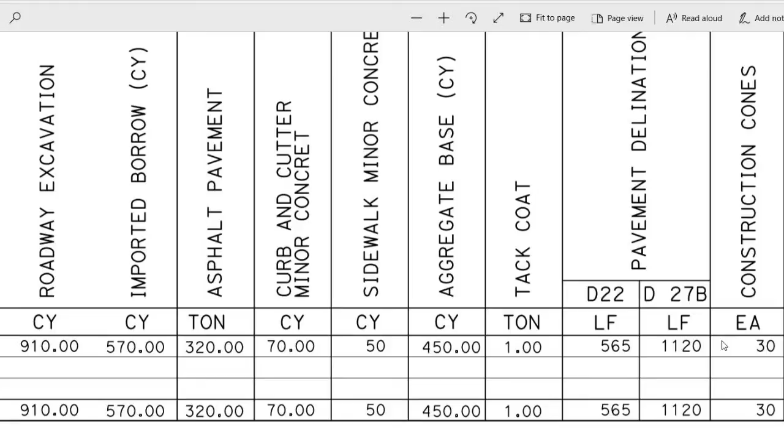But before they do that, I put my own prices on it, and I don't think I have an engineering estimate on this here because I didn't want to touch it. I told the people I can't put prices on these things. I did that with my stuff, and it didn't go well. People couldn't understand it. But since this is an actual thing and they were ready for it, I said, okay, you guys, this is the quantity, but you put the price on it based on how you guys charge in Liberia.

Okay? So the engineer's estimate, you do your own estimate. That's why they bid based on the engineer's estimate: based on all the quantities you put together, you come up with a dollar amount. So say on this road, all the quantities that I just calculated come to, let's just say, $50,000, $60,000. The contractor takes these amounts, he's not going to change them, but he wants to make profit. So he puts his own price on it, maybe 5 or 10% on it, and then they open a bid.

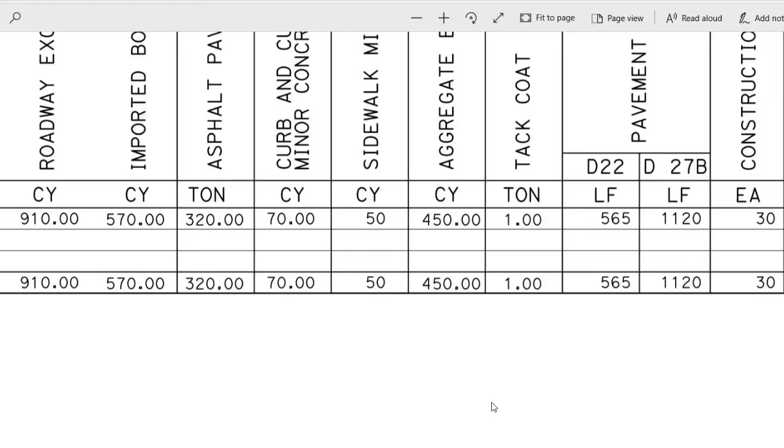It's okay if he's above the engineer's estimate because they're going to have a category. They're going to say, based on the calculation that we have, the contractor should come in at most 7% above or so. So say I got $50,000 on this road as an engineer, it went through all of the engineering processes. Everybody checked my dollar amount. Those who do the peer review have done that. They all certify that this thing is 50.

Then the contractor comes out and says, no, it's going to be 100,000. You're not getting that bid. Way above, 100%. So the next person comes and says about 45, 46,000. Very close. So you go through that line and see who's close to the engineer's estimate. And once you find the person who's close to the engineer's estimate, then you give them the award and say, okay, you win the bid, but let's see your capacity.

Give me the information, because by the time the person has bid, they've usually already been established with whoever the owner is. But if it's a new company, then you ask them for references. Then they show you some of the things they have done. Just like when you're looking for a job, based on past experience, you contact all of the owners where this person said they have worked, and they can verify that this person has done a good job.

Even though they're lower, you can give it to them. But if they don't meet that criteria, they hire the next person who bid higher, and if that person has the capacity and passes all the background checks, that person wins the bid. Okay, this is how you do this whole bidding process.